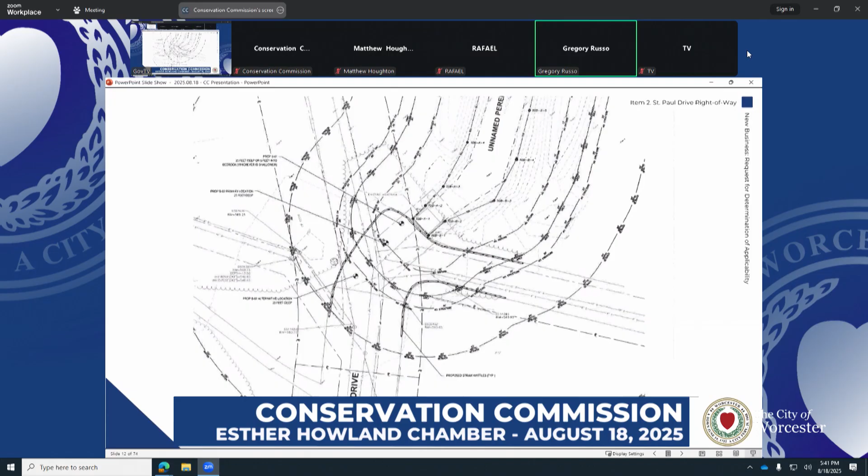The other soil boring has two potential locations, and the final selection of one of those is dependent on the location of the underground utilities when they do the dig safe survey to determine the exact location. So depending on how those surveys come out, one of those borings may also be located within the 15-foot no disturb zone, or it may be located further out within the riverfront area.

The entire site is located within bordering land subject to flooding.

Staff comments? So this work is proposed within already disturbed areas, but as he mentioned, it is within bordering land subject to flooding. Within their application, they review how grade will be returned to the current existing conditions and do meet performance standards. So at this time, staff doesn't have any concerns with this project.

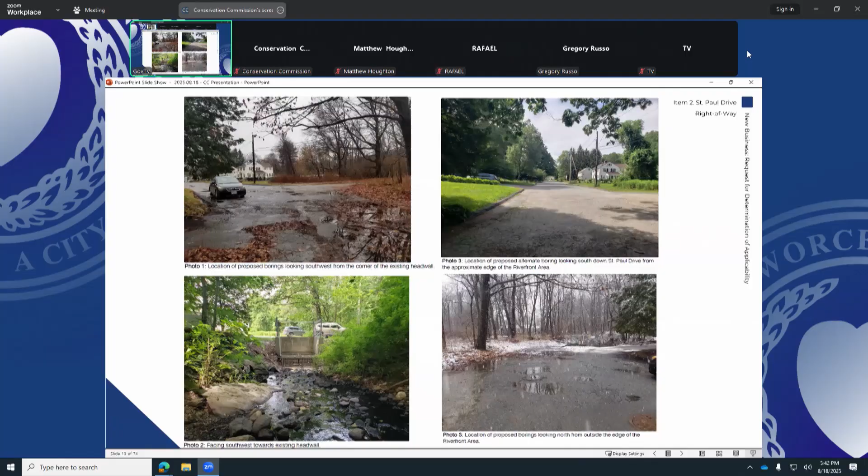Okay, any of the commissioners, questions or concerns about the borings? Through you, Madam Chair. Yeah, if you can just talk a little bit about any special provisions that you're making as far as making sure any soils that are removed don't make their way into the perennial stream, et cetera.

Yes, the boundary of the work area will be protected using straw wattle, and those are visible there on the plans. Yeah, that pattern that you're pointing to just there. So it'll be actually on both sides of the road, the opposite corner as well. It's not going to cross the road, obviously, so as not to block the road, but it'll be contained as much as possible.

And any material that's removed, what's the plan? It'll be backfilled once the boring is complete. Okay, no temporary stockpiles or anything? I don't believe, at least not long term.

Matt, do you have a different answer? He's got his hand raised. Yes, thank you. So the soil that gets temporarily removed out of the boring will be placed in a tub where the sampling will be taking place, and then it'll be backfilled within the same day back into the boring hole. Great, thank you.

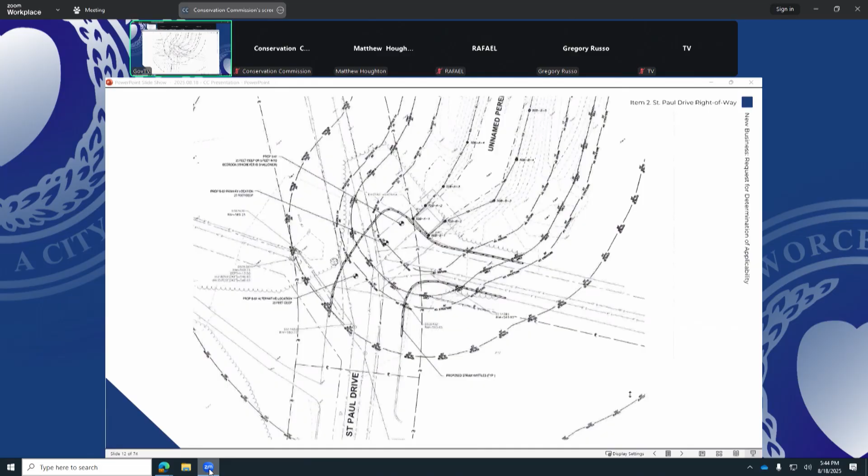Any questions from the public? Anyone online? Raise your hand on the Zoom app, or star nine if you're on the phone.

Okay, make a motion for a negative determination? Second. Do we have Stuart back yet? Commissioner Canton? Aye. Commissioner Nystrom? Aye. Commissioner Frattoni? Aye.

Right, all set. Number five, notice of intent, 56 May Street.

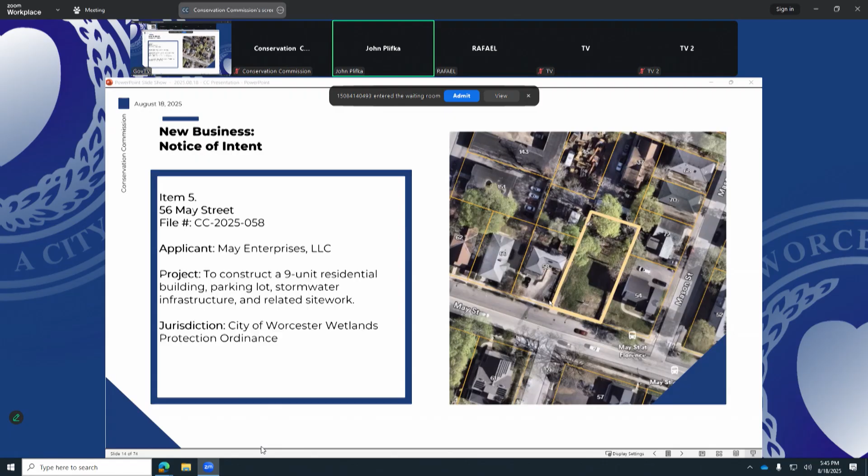The project recently received approval from the ZBA and the planning board, and we're filing this project under Worcester's local ordinance, as the project is approximately 53 feet from an existing catch basin in May Street.

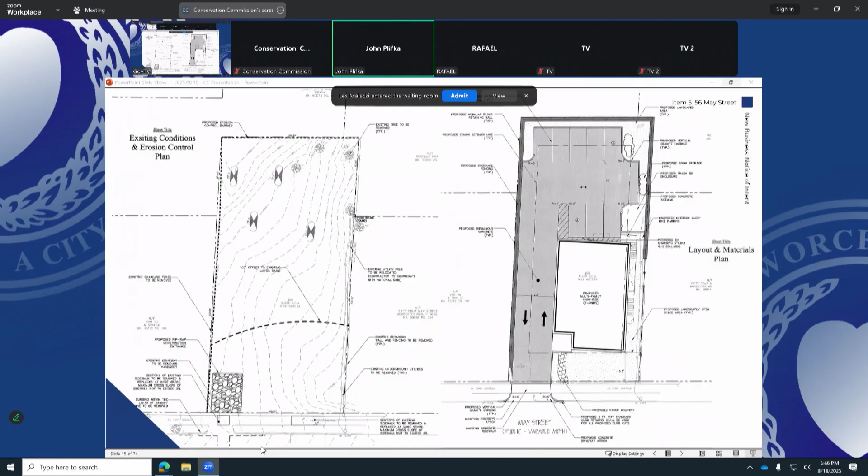The project consists of a single building with associated site improvements. Stormwater created as a result of the proposed rooftop will be collected in a series of roof leaders and then conveyed to an underground infiltration basin located in the rear of the lot. Any runoff created as a result of the proposed pavement will be diverted to a catch basin that is also a water quality unit, and then conveyed to that same underground infiltration basin, and then diverted out to existing municipal stormwater infrastructure within May Street.

So that's kind of my quick overview, but I'd be happy to answer any questions that anyone might have. Staff comments on the project?

Staff issued a comment letter with some requests for minor plan changes depicting perimeter erosion controls, which were added to a revised plan. We had a comment about standard 2 being peak rates of runoff. Those were shown to increase during all storm events except for the 2-year.

We went back and forth with the applicant's engineer on this a bit. They're asserting ultimately that the site is subject to the stormwater standards only to the maximum extent practicable because it's a multifamily residential development between 5 and 9 units. So ultimately full compliance with the standard is not required. They're also asserting that they've maxed out the size of the infiltration unit that they can for this site, and that's the reason they're not able to provide any additional peak rate attenuation.

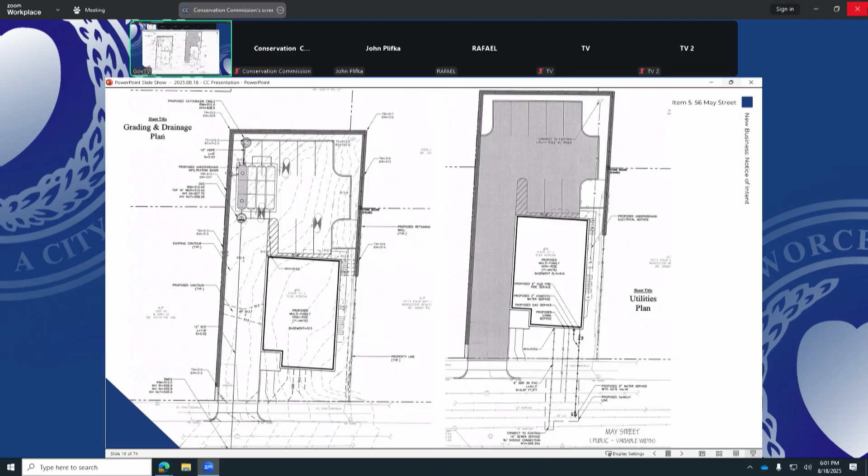Thank you. Through the chair, if I could ask a question to the applicant: had you considered any measures for detention, strictly detention, rather than just infiltration, that would allow a reduction in peak rates and still allow for an offset for the infiltration unit? Like a separate detention system that wasn't designed to infiltrate?

We had not, no, we showed for the infiltration.

Anything further from commissioners? Anyone here for this matter like to speak on it, or online? Raise your hand function on Zoom, or star nine if you're on the phone. Nobody? Okay.

Is there a motion to close the hearing? Motion closed. Second. Commissioner Canton? Aye. Commissioner Kirshner? Aye. Commissioner Nystrom? Aye. Commissioner Frattoni? Aye.

So staff has drafted an order of conditions for the proposed project, in addition to the standard conditions.

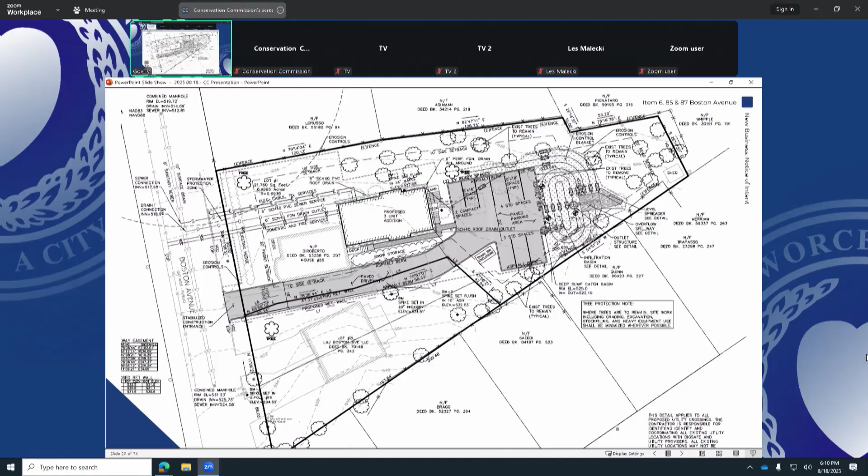So just for my clarification, when you calculate the impervious surface, how did you deal with that driveway that has a property line partway through the middle of it? The property at 87 contains an easement for the construction or expansion of the existing driveway, so all of the new impervious surface was included as part of the stormwater design, even though it wasn't on the parcel. Correct. Okay, thank you, got it.

Any questions or comments from the public? Anyone here—raise your hand on Zoom, or press star nine if you're on the phone.

Make a motion to close? Second. Commissioner Canton? Aye. Commissioner Kirshner? Commissioner Nystrom? Aye. Commissioner Frattoni, aye.

Is that order of conditions? Yes. So in addition to the standard conditions, we have 32 for trees to remain, 37 for stormwater management system maintenance, 39 for certification of stormwater infrastructure, 46 for wood removal, 48 for dust control, 49 for dewatering, 50 for cement truck washing, 66 for sand and salt, with ongoing conditions 37 and 66.

Any questions about the conditions? No. Any comments? I have none.

Make a motion to issue the orders of conditions as described? Second. Commissioner Canton? Aye. Commissioner Kirshner? Aye. Commissioner Nystrom? Aye. Commissioner Frattoni, aye.

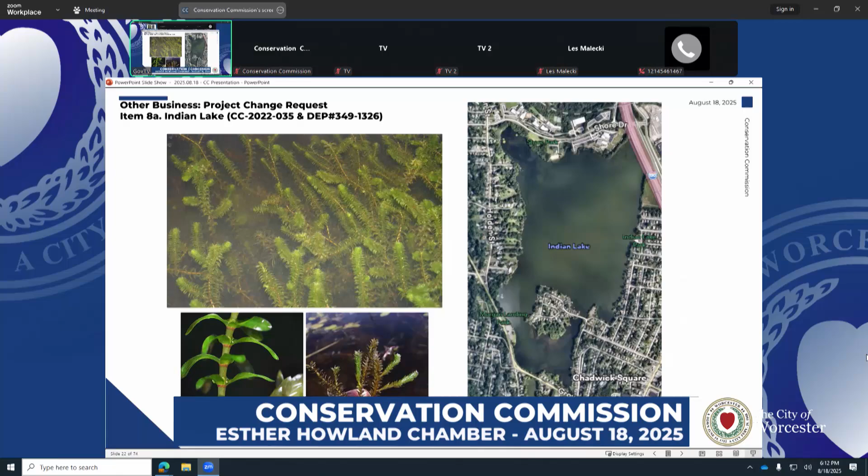Our current permit includes the use of a lake winter drawdown to manage the invasive plant Eurasian milfoil. After an herbicide treatment eradicated the milfoil several years ago, the drawdown was discontinued. So today we're submitting a project change request to update this practice to apply it to the management of nuisance native plant species. This year there was pretty excessive overgrowth of the native plant Elodea, which provides some habitat, but impeded habitat in this case because of how thick and how dense it grew, not to mention its recreational impacts.

So we'd like to do a drawdown over the winter to control some of the Elodea, some of the native plant growth, to the extent possible, while still maintaining sufficient plants to provide habitat for aquatic organisms and keep the lake at a healthy balance, rather than having such extremes as we saw this year.

It's very possible that additional management techniques could be necessary on top of the drawdown. To get to that point really depends on the exact conditions year to year. The exact plant growth is pretty hard to predict in advance of what the weather conditions and what the nutrient conditions are in the lake.

But we'd like to start with a drawdown of 1.5 feet. Pretty recent research has shown that 1.5 feet is a height that is less likely to lead to some of the negative potential impacts of a drawdown.

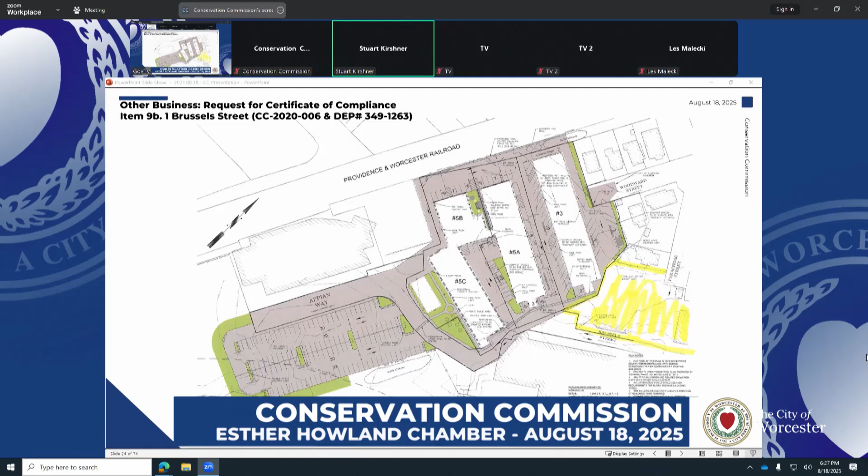Make a motion to issue the partial COC for Brussels. Second. Commissioner Canton? Aye. Commissioner Kirshner? Aye. Commissioner Nystrom? Aye. Commissioner Frattoni? Aye. Next item up, I am recusing myself, so I am turning the meeting over to Commissioner Canton.

All right, so this certificate of compliance request is for 224 Brook Street. An order of conditions was issued back in 2020 for the construction of 2 triplexes and associated driveway, stormwater infrastructure, and utilities. A letter was received from a professional engineer confirming substantial compliance with the approved plans. Staff completed a site visit on August 12th and confirmed the site is fully stabilized at this point, so staff has no concerns with a full certificate of compliance being issued.

So moved. Second. On the order, Commissioner Kirshner, Aye. Commissioner Nystrom, Aye. Commissioner Canton, Aye.

348 Salisbury Street, and I can take this one. This was a single-family home that involved a wetland crossing. The wetland crossing had actually been permitted years prior. They had installed the crossing but never fully constructed the driveway or the house. So a few years ago, they came in for permitting again to construct the house and finish the driveway.

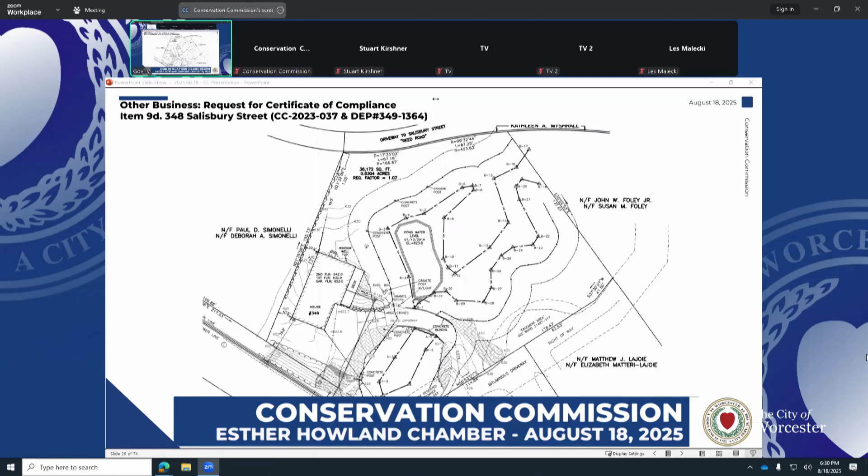Just a procedural question: for these certificates of compliance to be on our agenda, do they have the same requirement to file ahead of the meeting, or can they come in later? As far as the filing deadline, we can be a little more flexible with certificate of compliance requests, because we don't have to post legal ads for them in the Telegram, which is the main driver of when we have to accept any new NOIs or things we have to advertise hearings for.

Was this received too close to the meeting? Yeah, normally I look at them and I'm like, I don't remember this one.

Make a motion to issue the certificate of compliance for 348 Salisbury. Second. Commissioner Canton? Aye. Commissioner Kirshner? Aye. Commissioner Nystrom? Aye. Commissioner Tony, aye.

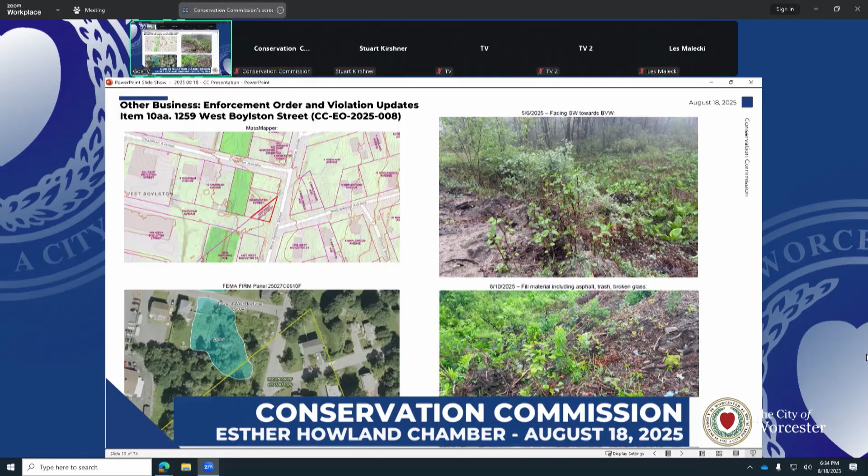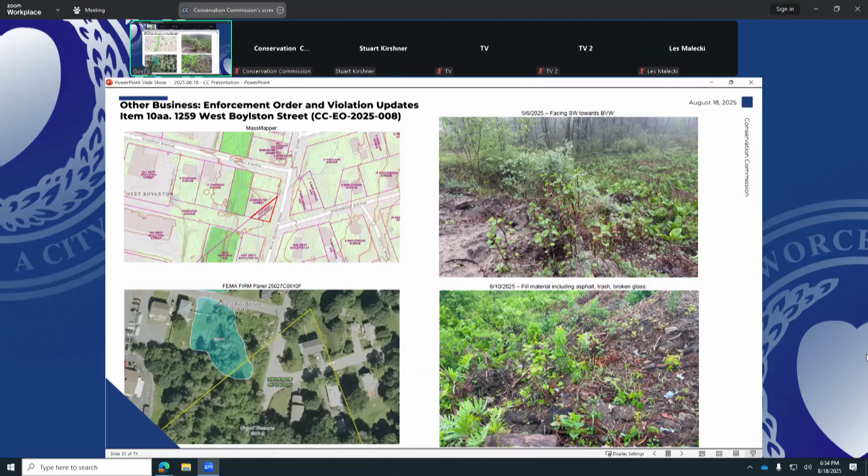So we had noted some minor construction activities like stockpiling and a little bit of grading back in April when we were doing a site visit at the adjacent property. We reached out to the property owner, informing them of the commission's jurisdiction with regards to work in proximity to wetlands, telling them not to do anything further without a permit and to stabilize any exposed areas still present on site. In subsequent site visits in May, June, and July, we noted continued activities, so we issued an enforcement order for the site located within Worcester. The same property owner owns the adjacent parcels across the town line in West Boylston, and the majority of this activity is on those, but our jurisdiction is limited to the limits of the city, so anything required in this EO is strictly limited to the parcel in the city of Worcester.

The stockpiles you can see on the top right corner of the screen are at the top of a slope directly adjacent to a bordering vegetated wetland. It was evident there was fill within the BVW because you could see fresh sediment on top of obligate plant species like purple loosestrife and skunk cabbage. It was basically all wetland vegetation. You could see the saturation in the soil after no rain for I don't know how many days, so it was quite evidently a wetland even from standing on the side of the road.

We issued the enforcement order requiring the property owner to hire a wetland scientist to come up with a report detailing the quantification of resource area impacts as a result of this fill and alteration, and then to come up with a remediation plan. We forwarded this to the Town of West Boylston Conservation Commission as well.

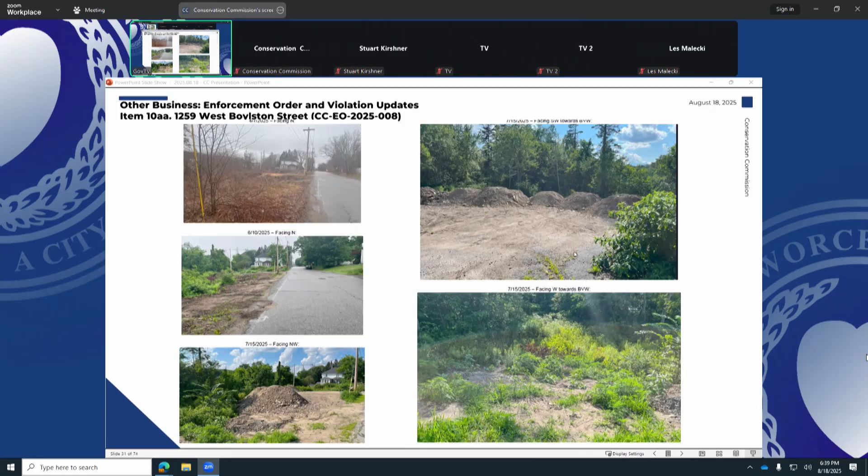Correct, yeah, so we've talked to both DCR and DEP about this. DCR has involvement in this due to the Watershed Act, which I'm not very familiar with, but this part of the city is located within an outstanding resource water area due to its proximity to drinking water supplies. So DCR has involvement in placement of fill within wetland areas or work

within a buffer zone to the bank. And DEP obviously also has, they receive all of our enforcement orders, so we talked to them about this one as well. They just wanted to make sure that we were able to coordinate with West Boylston on this because a majority of the violation is in West Boylston, and it can be tricky coordinating across municipalities.

But I think based on today's meeting, it seems like the chair is willing to stay in regular communication with us. They don't have full-time agent support in West Boylston, so it sounds like the commissioners do a lot of the heavy lifting over there. So we're happy to work with them and try to get a favorable outcome for the wetland on this property. Thank you.

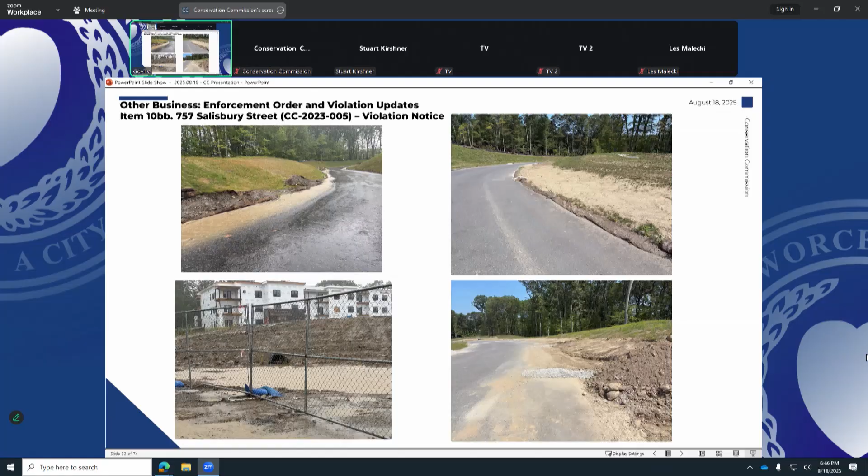I agree, because if they come to the next meeting and nothing's done, I'm not necessarily going to be in very good graces. Yeah, I think if nothing's done by the end of this week, staff would probably issue an enforcement order on our own. I'm glad to hear that.

In the email exchange on this topic, I don't remember who said, well, maybe we should have phased this project, which clearly they should have. So would it have been in our commission's control to require the phasing for this reason? Not that I'm armchair quarterbacking the decision made at the time, but, you know.

Yes, the commission could, and we did look at a phasing plan in some detail at the beginning of this project, because this is another one of these situations we see frequently, where there are very large sites involving significant earthwork that result in a lot of open ground, which is obviously a problem for stormwater runoff.

If you think back to the Grafton Woods project we reviewed recently on Brant Lane, that's an example of how the commission can condition the phasing of a project to require certain sections to be done before moving on to the next phase. So yes, it's certainly within the commission's purview to do that during the permitting process, or during enforcement proceedings if things don't go according to plan.

But I remember when this project came in for permitting, it was a staff concern that this would be a potential issue, just given how the site all drains down to this low point, which goes directly to the street.